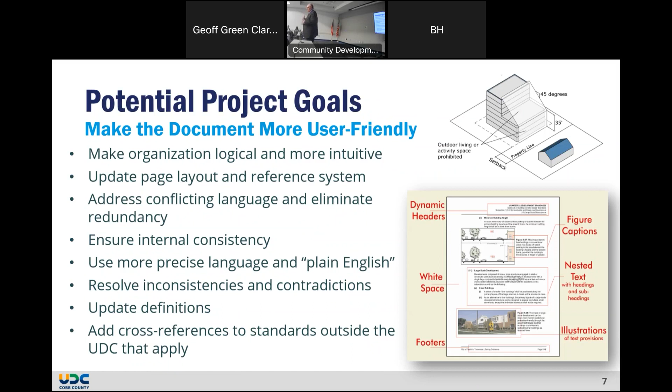Geoff, if you could go to the next slide.

Another thing that could be done to make the development regulations much more user-friendly is to take advantage of advances in software technology over the last decade. It's pretty amazing—I've been doing this for 30 years, and it's amazing what you can do today with a zoning ordinance compared to when I started in this field, in terms of using graphics, photographs, and that sort of thing.

Your codes are very old and haven't taken advantage of these types of tools. We suggest doing that, and I'm going to pass this around just to give you an idea of what could be done.

We did a development code for the city of Maitland, Florida, an inner-ring suburb of Orlando. It was adopted last summer. It shows basically how you can integrate things—this is a zoning district example. If you look at the zoning districts in your current code, it's all text, strung over multiple pages.

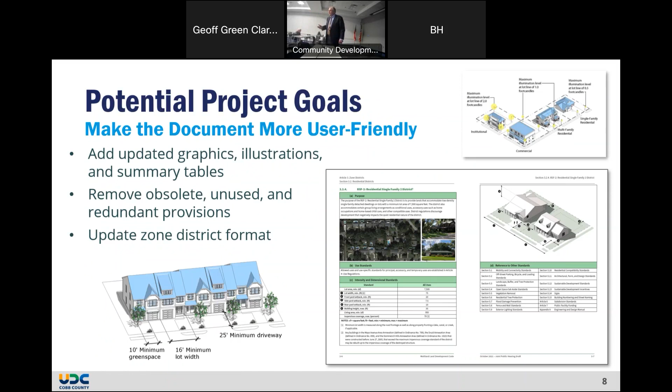This is another code, from Henrico County, Virginia, in the Richmond metro area. This is basically zoning.

So these are just some of the things that we can do to make the code much more user friendly. The other thing that I will highlight, and I'm going to turn this over to Geoff, is your recently updated comprehensive plan, which identifies 5 or 6 what we consider to be very important goals. One is protecting the character of existing suburban neighborhoods.

Let me emphasize - and Geoff will emphasize this more when he talks about zoning districts - that we have heard loud and clear from the focus groups, as well as the meeting we had last night and other meetings, that the current residential zoning districts are working well. They need to remain as they are.

And certainly that will be carried forward in the updated UDC. But protecting the character, the other thing is to build on the current standards in the code used to protect the character of suburban and rural neighborhoods. Encouraging redevelopment and infill development in the activity centers is something else identified. Conserving natural and historic resources, generally supporting economic development where appropriate, and providing an opportunity for a variety of housing types - those are objectives and goals identified in your 2040 comprehensive plan.

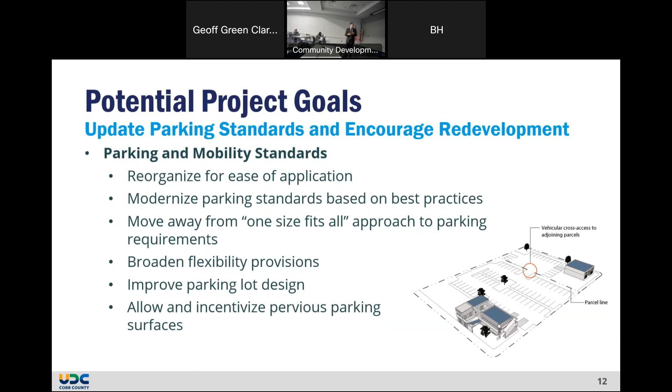The other thing we heard, and I think Craig mentioned it earlier, is there was talk about the design of parking lots and improving the landscaping and look and feel of those - landscaping and tree protection.

They'll be tailored to different contexts. Another thing we heard is there's concern about clear cutting of trees and preservation of important trees, so we'll look into that, and we'll also consider integrating the tree ordinance into the UDC, since a lot of it has to do with development.

Exterior lighting - we'll look into new exterior lighting standards. They're pretty simple, but they can make a pretty big impact on quality of life at nighttime, and especially help preserve the night sky.

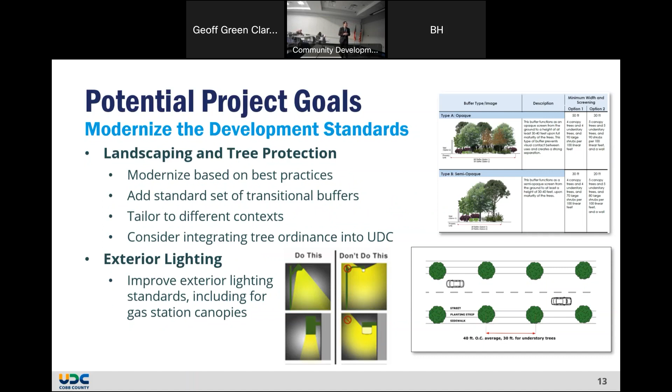Stormwater - we heard, especially from staff, that the current regulations might get in the way of some of the green infrastructure alternatives you might use these days that have been developed over the last couple decades. So we'll look into that - that's something Stantec will really help us with, as they're experts in this field.

Neighborhood compatibility - we've heard that generally the county does a pretty good job making sure new commercial development near an existing residential neighborhood is designed to mitigate impacts of noise and light, things like that. So we're going to make sure the new UDC has a good set of neighborhood compatibility standards, so new developments continue to have limited, minimal impact on existing neighborhoods.

And finally, signs. Your sign regulations were updated not too long ago, but they're very text heavy. That's a particular case where we think having some graphics and illustrations will help make clear the intent and purpose of the regulations.

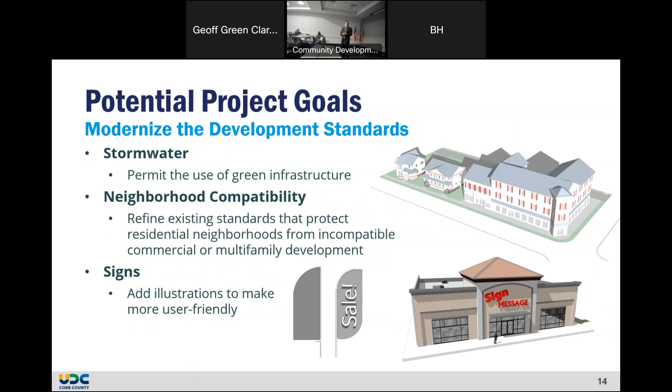Out of curiosity, if we're retired, do you want us to just answer it in Cobb County, or instead of? Probably just live in Cobb County. Oh, okay. This is not scientific, this is not going to be. We're just sort of curious about this here. All right, thank you, David.

Okay, so now we're going to start with the polling and project goals. We're going to start with 5 of the Cobb 2040 priorities that we identified as being relevant to this project. We'll just go ahead one by one.

First is encouraging redevelopment and infill development in identified activity centers. Jessica gave us a 110-mile tour of Cobb County this morning. We spent 4 hours visiting, and we looked at the town center as well as the Cumberland regional activity centers. We know there's, especially at town center, a lot of potential for redevelopment, and there's also opportunities for infill development in the county. We're going to hide the answers at the beginning to give folks a chance to respond, and then we'll show the results.

Keyword here is identify - yes, already existing on the land use plan, existing on the future land use map. May you please describe infill development, what is that? Yes, so redevelopment is when you take an existing site and redevelop it generally into something more intensive. Infill development is when you take an empty lot or an empty area and add development that is compatible with what you have on either side. Thank you.

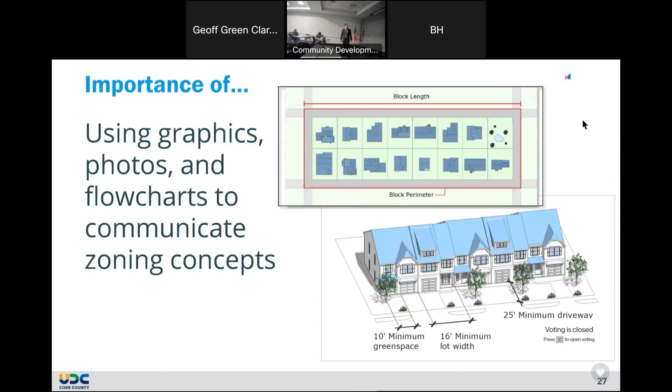All right, next we're going to talk about the project goals relating to having an easier to use code. If you go on to the next one - so using graphics, photos, and flowcharts to communicate zoning concepts. That's something we've identified looking at your current code, where there aren't a lot of illustrations. We think there's some opportunity to improve the user friendliness by including these in the new UDC.

Looks like most folks think that's an important priority - a more logical organization, a little easier to figure out where applicable provisions are.

All right, that's great. You all are very quick with the responses.

And more streamlined and logical development review procedures. Now, mind you, this doesn't mean making it easier for projects to get through. This just talks about how the procedures are explained in the document and how clear they are, and making sure there aren't any unnecessary steps or confusing processes in the procedures.

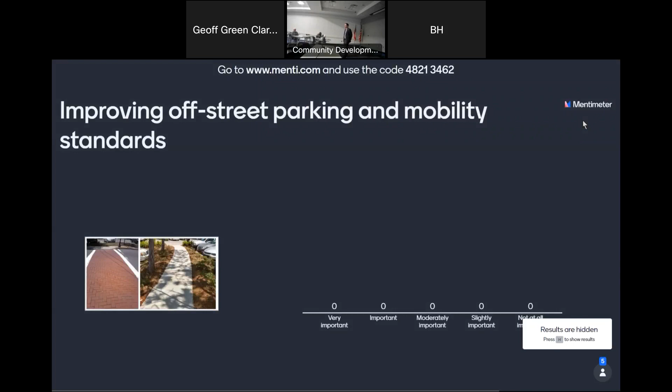Okay, a few questions about development standards. We want to learn about your priorities, see how important these are for you. The first is improving the off-street parking and mobility standards. That gets at both the number of parking spaces the development is required to provide, as well as the design of the parking spaces - requiring larger tree islands to provide additional shade, providing paved walkways like we showed here through parking lots to make it safer and easier to get from your parking space to the store or building you're trying to access. There's a real mix there.

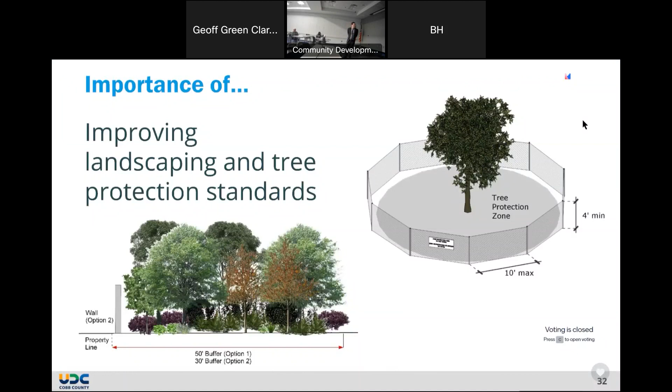Improving the landscaping and tree protection standards. The landscaping can apply to buffers between properties, it can apply to vegetation along the street, and it can also apply to vegetation within development and within parking. Most people think that's at least moderately important - everybody thinks it's at least moderately important.

That's a good thing to note, and we'll note that - if you can write that in the survey. But what we're asking about here is just lights, not signs - street lights and also lights within parking lots and lights on site as well.

It's mixed. A lot of people think it's important, but maybe not the top priority.

Finally, the last question is about improved neighborhood compatibility standards. We want to know how important a priority it is to have standards that mitigate any impacts that development coming near existing single-family residential neighborhoods may have on these neighborhoods.

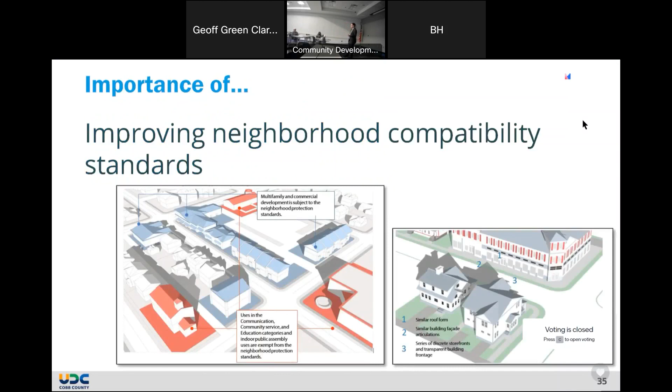Is this what you mean, what we call it? Compatibility standards - is that what we call allowed uses?

It's mostly not as much about the uses that are allowed, because that should hopefully be taken care of by zoning and what zoning district is assigned to that area. It's more about if there is a permitted use going into that site, whether it's a small store or a restaurant, making sure it's designed in such a way that any impacts it's going to have on neighboring property are directed away from where the single family residence is.

So like backyard chickens? No, that's not quite it - we're talking about uses that are adjacent to the homes in a district, not in the same district.

Okay, now that would include density, right? It can include density. I mean, generally these get at sort of the massing - I think that's clear. All right, yeah, we understand that.

I've been to a lot of meetings where I was like, what role does Marietta - the Marietta Housing Authority - have to do with our zoning regulations and development regulations?

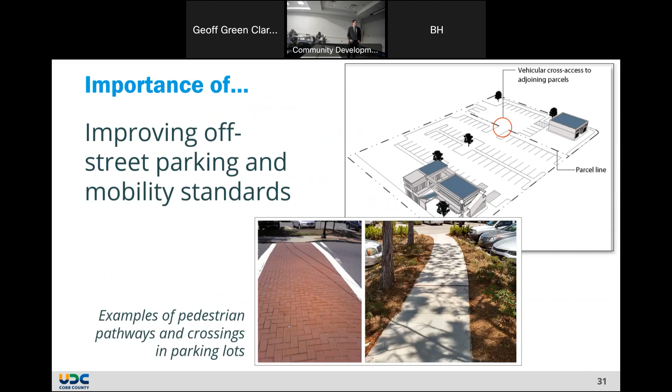So the other issue I had was it looks very interesting, but it's not pretty safe. And I want to know what addresses those issues dealing with age, housing and stuff like that. So what in particular do you think we need to include in these plans about being more age friendly, like more sidewalks?

I think this is a great opportunity and a good segue to the next question here about what other goals you think need to be addressed in the update. So, is livability for seniors in Cobb something we want to be sure is included, and if so, what are some of the things that you think might make Cobb County more livable for seniors?

It's just not for seniors, it's supposed to be transportation, sidewalks, mobility, roads that we already have. Right, I don't know what you talked about, but those are some of the issues - just having the availability of services for seniors.

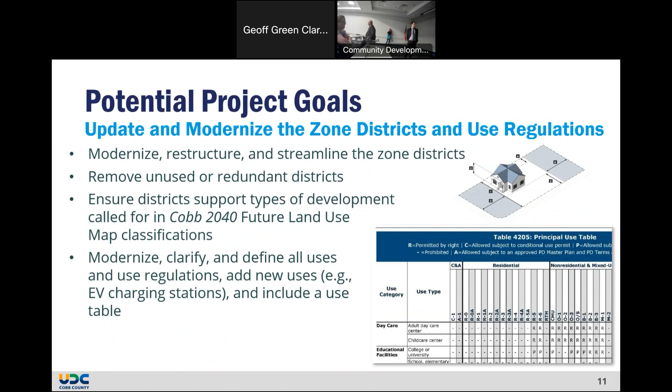And I represent a neighborhood where this is unusual—we are adjacent to an industrial area. We like the industrial area, we want to keep it. So some neighborhoods might be opposed to industrial; we're not. You mentioned residential, commercial, activity center—industrial is an important type of development too, and it clearly needs to be included in all this, with guidance for those of us who want to keep the industrial area we're adjacent to.

We heard your comment, we made a note of that. I'll just tell you, we made copies of those districts just to show you how graphically we can do it. But I can tell you that in both of those communities there are multiple residential districts that only allow single-family uses, so it's not like it's different in a lot of other places.

Okay, I just have one quick comment. I still think there's a lot of misunderstanding about what this is all about. I'm actually a supporter, so I've been trying to do my part to help out with that if I can, on social media or something. But even tonight, I think we saw examples of misunderstanding what this is. This is a very narrowly focused topic—we're talking about a UDC, but it's not a comp plan. Now there's overlap, of course, and the UDC comes out of the comp plan.

But people brought up other topics, like housing. I think they have their own strategic plan, and the county's doing its own strategic plan too. I wasn't able to make that meeting, but that's where things like homelessness can be addressed. Something like that is not going to be addressed in the UDC. This is more about zoning, the overlap of zoning, and the more technical aspects of what goes into site development.